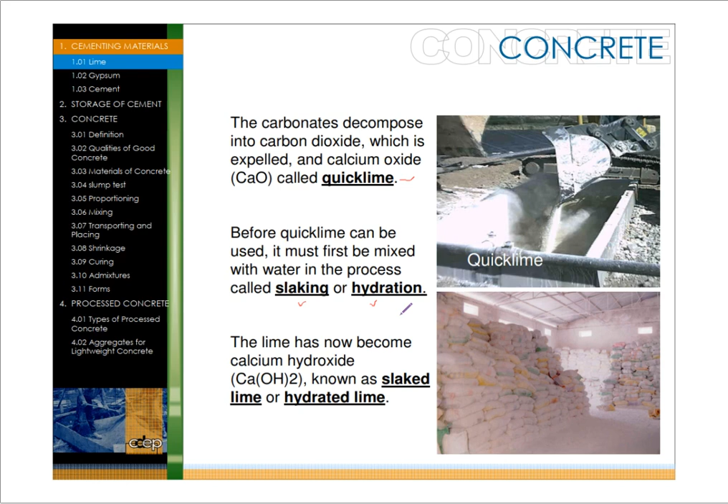So ito yung itsura ng hydrated lime, which is mixed with water to make it a lime putty. Parang halo siya with cement. Used as an ingredient for hard finish coat of 2 or 3 coat Portland cement plaster.

So it's used for mixing cement, mortar, concrete to increase workability, decrease permeability to water, kasi hydrated nga siya, kaya siya tinawag na hydrated lime, in order for the cement to be more workable, reduce cracking due to shrinkage. Kasi pag masyadong marami yung cement mo, it will crack often.

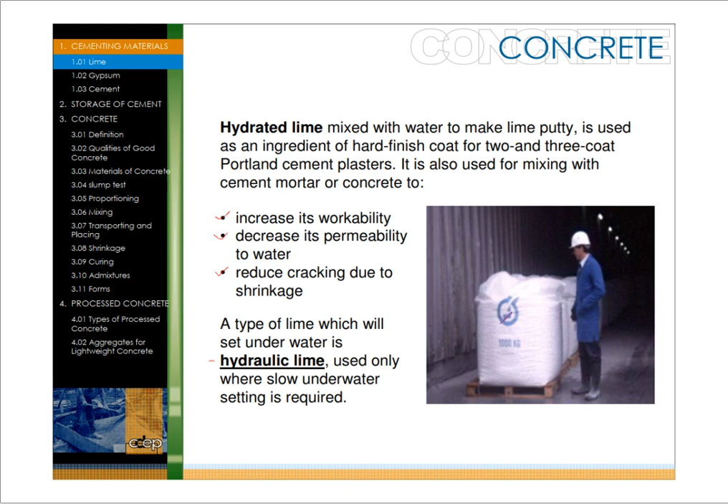So the type of lime which is underwater is called hydraulic lime, used only where slow underwater setting is required. Like for example, works on rivers, seaports, etc. Now that has something to do with concrete underwater or near shoreline.

Next type of cementing material, we have gypsum, another type na cementing material. So gypsum, like lime, was used as a plaster by Egyptians. Kumbaga siya yung isa sa mga ginagawang plastering finishes. Yan yung itsura niya, parang lime din. Used by Romans, Greeks, and Egyptians.

Plaster is from the Greek word for both the raw material and the calcined product. So in architecture terminology, plaster and gypsum are often used interchangeably. So sometimes it became similar. So the remaining product is plaster of Paris, which is pure gypsum, or hard wall plaster if 39.5% impurities are present or a retarder is added to set and improve the setting quality.

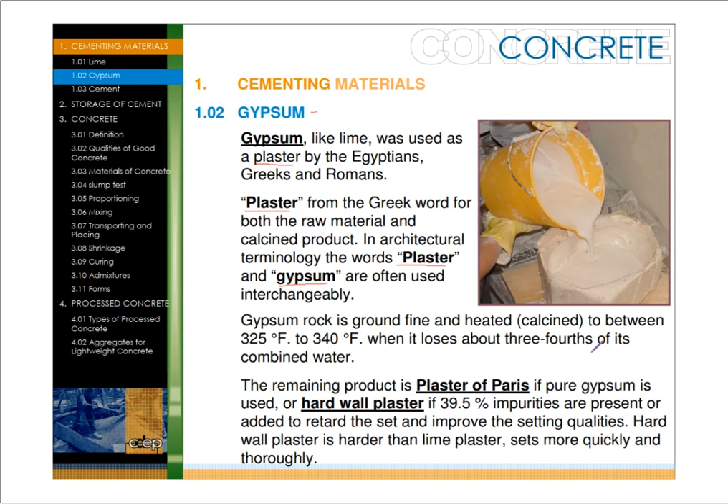Hard wall plaster is harder than lime plaster and it sets more quickly and thoroughly. So yan yung characteristic ni gypsum compared to lime. Okay? And gypsum plaster is rendered more plastic by addition of hydrated lime. Fiber or hair is sometimes added for greater cohesiveness.

So may mga tinatawag tayong admixture or foreign material to be added in gypsum cement to make it stronger. The fiber may be hemp, ito yung mga pwedeng ihalo diyan sa gypsum plaster natin, sisal or jute. The hair is generally clean goat or cattle hair so that hindi siya madaling mag-crack or hindi siya madaling mag-deform or masira kagad in case na matamaan siya ng anumang bagay.

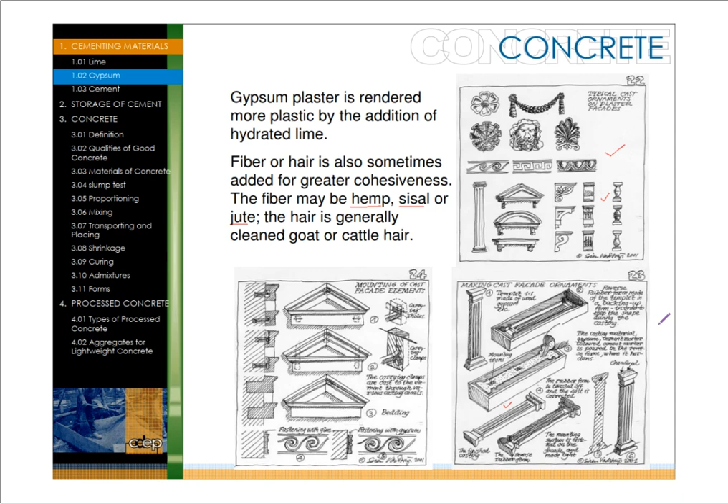And lastly, the very modern type of cementing material, we have the cement, which was first developed by Romans by mixing slaked lime. Ano yung slaked lime natin? Yun yung hydrated lime natin, with pozzolana, volcanic ash. Slaked lime plus pozzolana, which hardens underwater.

So with the fall of the Roman Empire, the art of cement making was lost for several centuries. So in 1756, Smeaton, an Englishman, rediscovered hydraulic cement, but it was not until 1824 that Aspdin, an English bricklayer and mason, invented and patented Portland cement.

So kay Aspdin napunta yung authorship ng pagiging inventor ng Portland cement. Kasi pag hindi mo yun na-patent, hindi talaga mapupunta sa'yo yung credits. So today, the word cement generally refers to Portland cement.

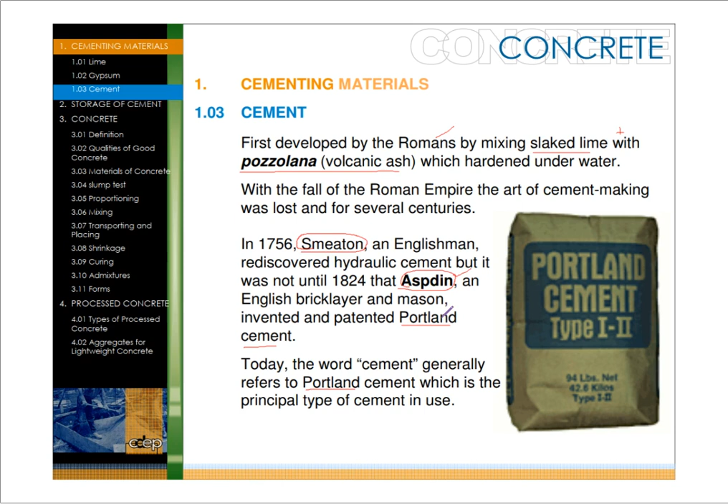That's one of the most popular brands of cement since the first release of cement, type 1 and type 2. Portland cement is obtained by finely pulverizing clinker produced by calcining a proportionate mixture of

argillaceous material. Argillaceous is composed of silica and alumina, and calcareous, which is lime. So these are the two main components or materials for cement: argillaceous, consisting of silica and alumina, and calcareous, the lime. So if you're wondering what are the ingredients for cement, Portland cement to be exact,

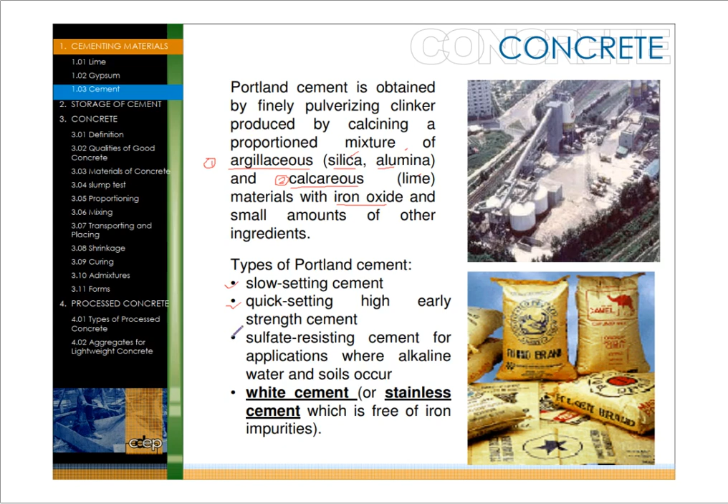it's just argillaceous and calcareous, with iron oxide and small amounts of other ingredients. So these are the types of Portland cement: slow setting, quick setting, sulfate resisting, and white cement.

Storage. So basically you're going to store cement in a storage area which has a wooden floor, raised. So it has a raised floor. Why do we put it raised? So that the moisture from our flooring won't reach the bottom of your Portland cement.

Because if it makes contact with water, or even if it just gets some moisture, it will harden. Not immediately, but some part of it cannot be used anymore once the cement hardens. So it's suggested to be 12 inches from the ground.

So cement is soft, silky to the touch, and lumps do not readily break. And the piles should be limited to 12 sacks in height. So when we count this, it will stack to a maximum of 12. You can go below 12, just don't exceed 12.

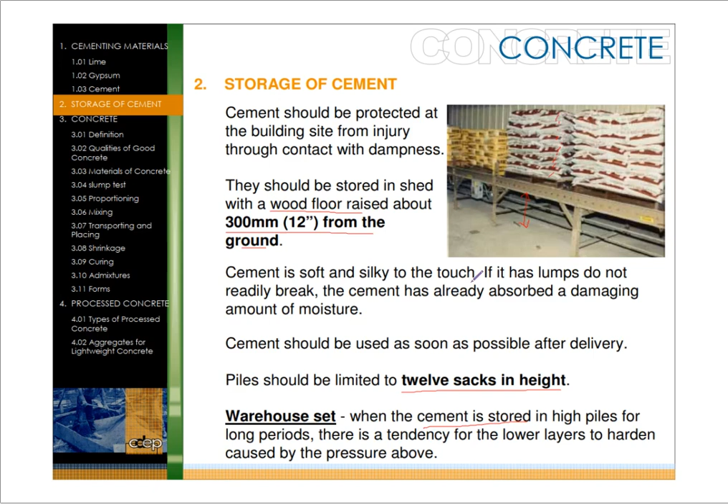Warehouse set, so it is the storage for cement for a long period of time. That's for the hardware stores, when they store a certain amount of cement in their storage.

The definition of concrete: it is a proportioned mixture. Why proportioned? We'll find that out later. So concrete is basically consisting of cement, aggregate, and water.

If cement is removed, it can't be called concrete. If aggregate is removed, leaving only cement and water, it's still not concrete. And if it's water only, you can't call it concrete either. It is basically a mixture of all three.

So it's a plastic mass which can be cast, molded, and formed into a predetermined size and shape. You can have a mold — that's what it means. Upon hydration, it becomes stone-like in strength, hardness, and durability. Hardened concrete is called setting.

That's why we have what's called 28-day setting. Like in our columns, it hardens to its maximum. The compressive strength is achieved at 28 days. That's why before removing the forms, it should be practiced at 7 days or more for the setting.

When mixed with water and fine aggregates less than that, it is known as mortar, stucco, or cement plaster. So when it's mixed with fine aggregates, that's what it's called.

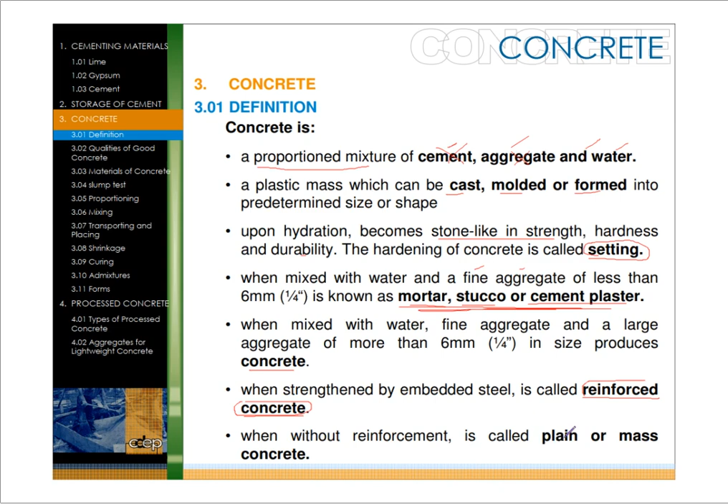When without reinforcement, it is called plain or mass concrete, or 'buhos' in Tagalog. Plain or mass concrete.

For the qualities of concrete, it should be strong, durable, uniform in quality, and thoroughly sound. That doesn't mean it has no imperfections at all, but it should be checked for this good quality of concrete. And it should be obtained through careful selection of materials, correct proportioning, thorough mixing, careful transporting, and proper curing period.

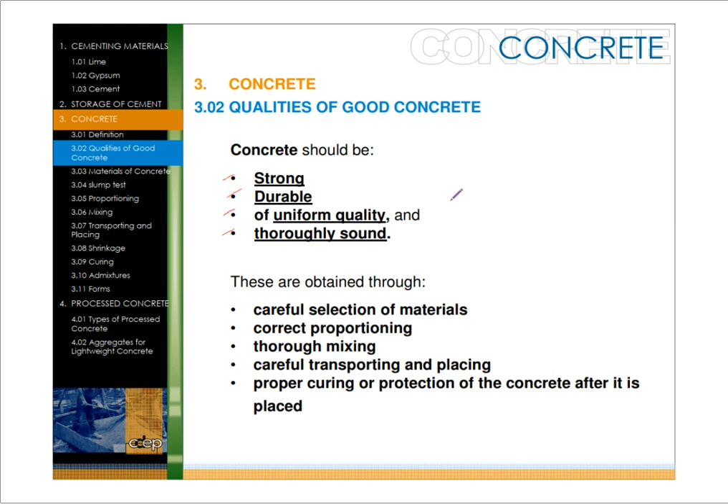We have materials, which is cement, and it conforms to the specification and test of Portland cement of the American Society for Testing Materials, or what we call ASTM, the standard specification and test for Portland cement. And the kind of tests usually made are soundness, constancy in volume, time of setting, fineness, and tensile strength.

So 1 bag of cement is approximately 1 cubic foot in volume that it can occupy. 1 cubic foot, and it weighs 94 pounds.

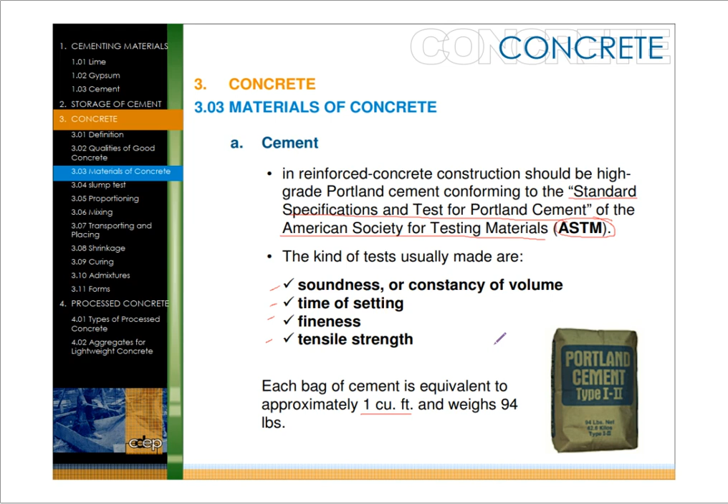Aggregates. These are the rocks, or small rocks. Depending on the size of the rock you put in the cement, it becomes called differently. So, if there are aggregates present in cement when mixing.

These are inert mineral fillers. It fills the larger gaps when you mix the cement with other combinations, cement and water and aggregates. So these are the fillers. It should be particles that are strong, durable, clean, hard, and uncoated, free from injurious amounts of dust, lumps, flaky particles, shale, alkali, and other foreign substances.

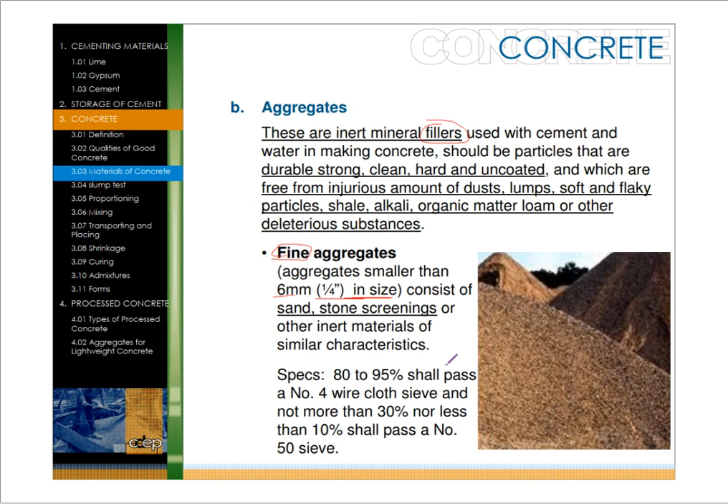For an aggregate to become fine, it should be smaller than 1/4 inch in size, or in millimeters it's 6 mm. It consists of sand, stone screenings, and other characteristics.

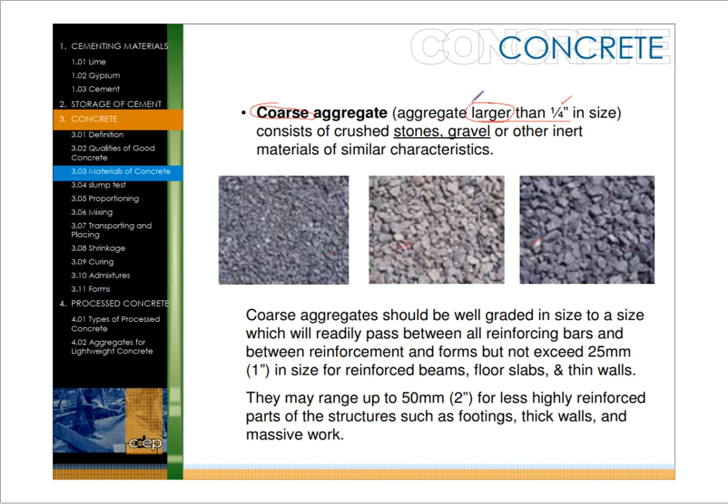Coarse aggregate. For it to be called coarse aggregate, it must be larger than 1/4 inch in size. It is consisted of stones, gravel, and other inert materials with similar character. This is what it looks like. There's a difference, but it should be larger than 1/4 inch in size to become a coarse aggregate.

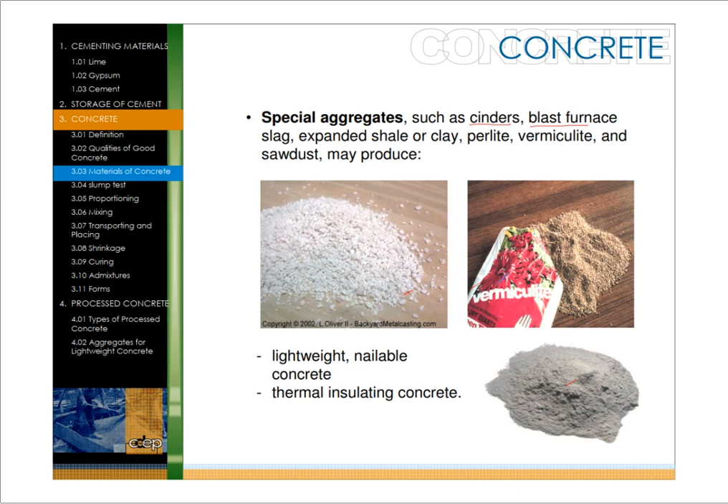Special aggregates such as cinders, blast furnace slag, expanded shale or clay, perlite, vermiculite, and sawdust may be used. These are examples of special aggregates, which are also mixed into the cement.

Water is the third material that concrete is composed of, and it should be free from oil, acid, alkali, vegetable matter, and other deleterious substances. It should be reasonably clean and clear. The use of sea or brackish water is not allowed, so don't get water from the sea.

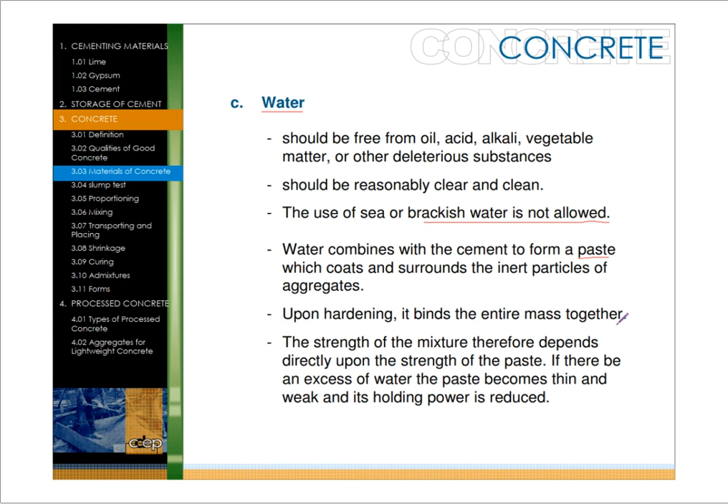Water combines with the cement to form a paste, paste-like, which coats and surrounds the inert particles of aggregates. Upon hardening, it binds the entire mass together, and the strength of the mixture depends directly upon the strength of the paste. If there is excess water, the paste becomes thin and weak, and its holding power is reduced.

Water-cement ratio is the amount of water used per bag of cement. It usually varies from 5 to 7 gallons, which is 6.5 on average.

The less water in the mixing, the better the quality of concrete, because if you add too much water, your concrete will become weak. It will be watery, and most of the concrete will be wasted in the water once you pour it into the forms. So this is the water-cement ratio, which has something to do with the compressive strength of your cement once it hardens.

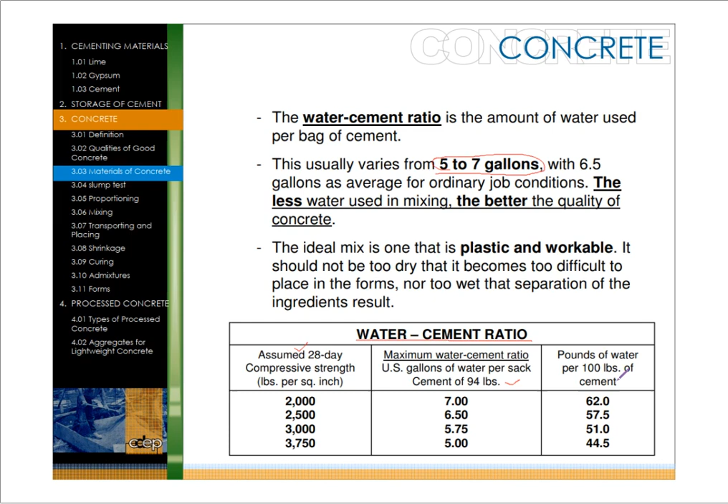Maximum water ratio is expressed as gallons or pounds of water per 100 pounds of cement.

Slump test. This is the test done by the structural team, which measures the consistency of the concrete mix. How do we determine this? In this test, the tendency of the mix is to slump or reduce in height due to gravity action.

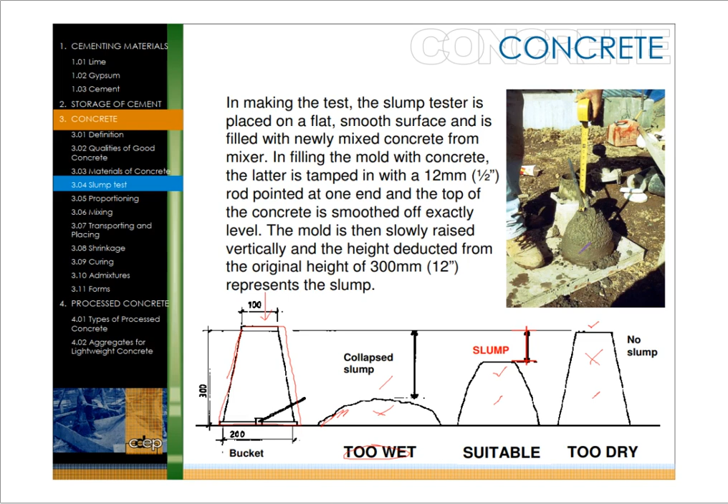So the mold is slowly raised vertically, and the height deducted from the original height of 300 mm is presented as the slump. This is what it looks like after the test, in this area.

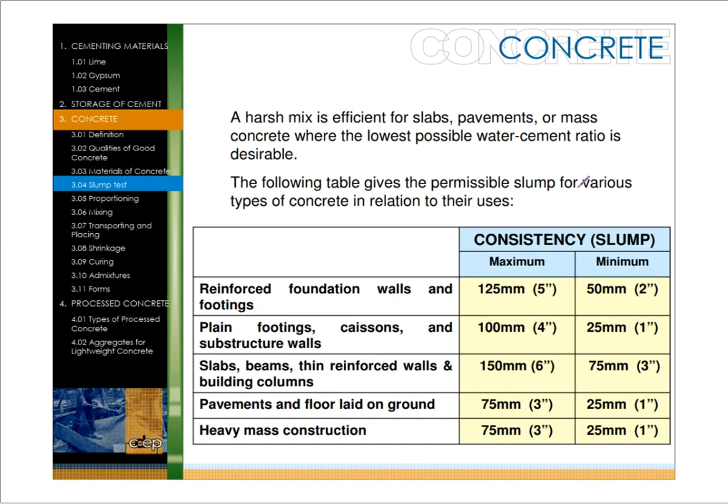We won't focus too much on this since it's more on the engineering side. So, proportioning a concrete: the strength and workability of a concrete mix depends on the water-cement ratio, and the economy of the mix depends on the proper proportioning of the fine and coarse aggregates. It basically has a relationship with the mixture you are going to use.

There are several methods for proportioning concrete. Number one is proportioning by arbitrary proportions, water ratio, slump test, water slump test, and fineness modulus.

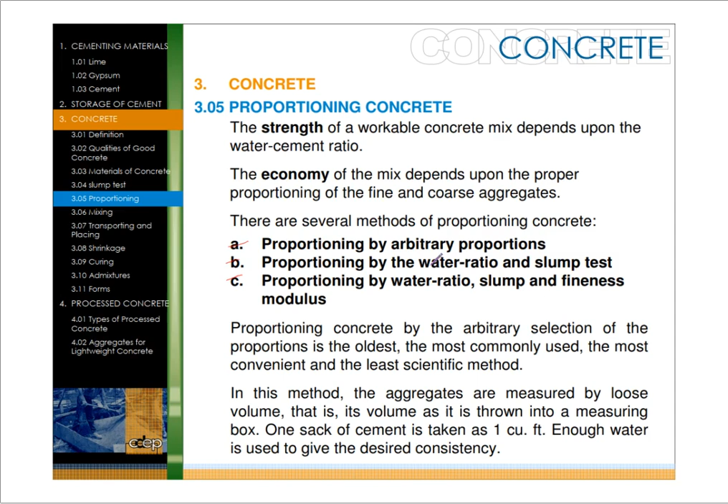So for proportioning by arbitrary proportion, meron tayong sukatan para sa certain proportioning. This kind of proportioning has been used by the construction industry for many years. Hindi ko lang sure kung meron pa siya ngayon kasi ngayon yung ginagamit is yung mga concrete mixer, may 1-bagger, 2-bagger, etc. So proportioning concrete by arbitrary selection is the oldest, the most commonly used dito sa province, sometimes ginagamit pa rin, and the most convenient but least scientific method kasi estimated lang ng mason or ng foreman.

For the common mixes expressed in proportion by volumes of cement, the fine aggregates to coarse aggregate are as follows. Different classes of concrete proportion are established for us to know how much or how many concrete aggregates are being used, and gravel also is present.

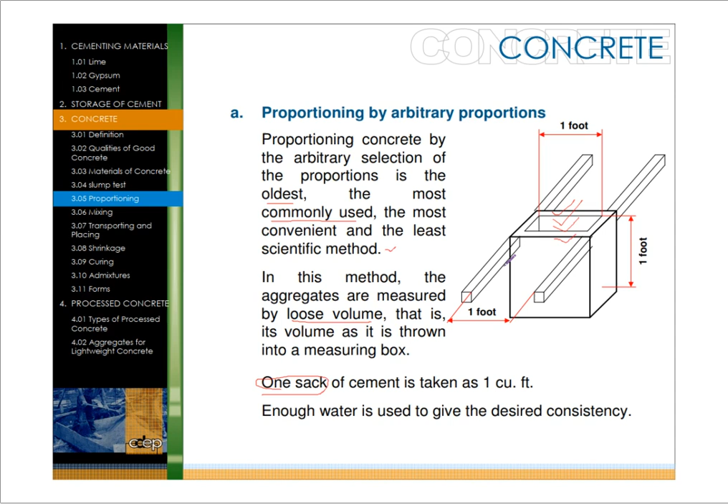Okay, so saan yan ginagamit? For suspended slabs, beams, columns, arches, stairs, wall of 100 mm or 4 inches thick, yung kumbaga yung normal wall natin sa mga bahay natin for the interiors, 4 inches thick. So that is class A na proportion.

How about class AA? Etong class AA, 1 sack of cement, 1.5 sacks of sand, sacks din yan kasi basically yan yung ginagamit natin, and 3 sacks of gravel. For concrete, underwater, and retaining walls, yung usage niya. Same goes with class B, class C, and class D, you just have to know how it incrementally increases from class A, B, C, and D.

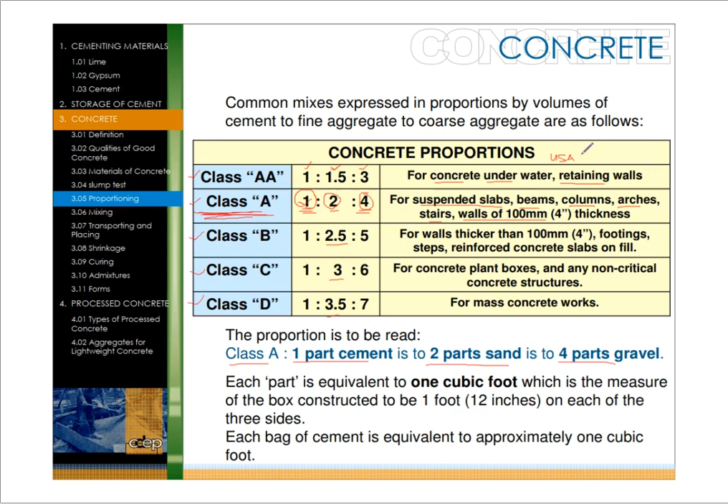So magkakaiba yung proportion niya. Lumalabas din to minsan sa board exam. Isa to sa pinaka naalala ko nang kumuha kami, tinanong yung class A, yung nasagot ko pa is 1:2:3. Kaya dito pa ako nagkamali, na sobrang dali lang siya sa uluhin. So they have different kinds of usage, ito yung kanyang usage typically for the concrete proportions.

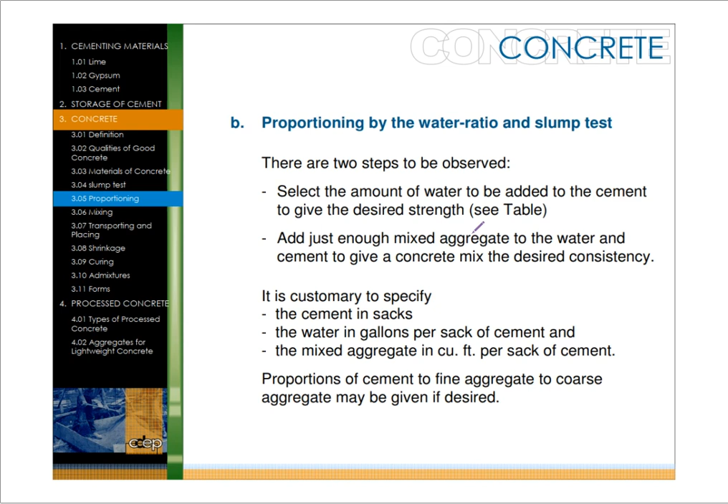Okay, moving on. Ito, water ratio and slump test, hindi na natin itong masyadong ginagamit, pero pag malaking construction, ginagamit yung slump test para sa proportioning.

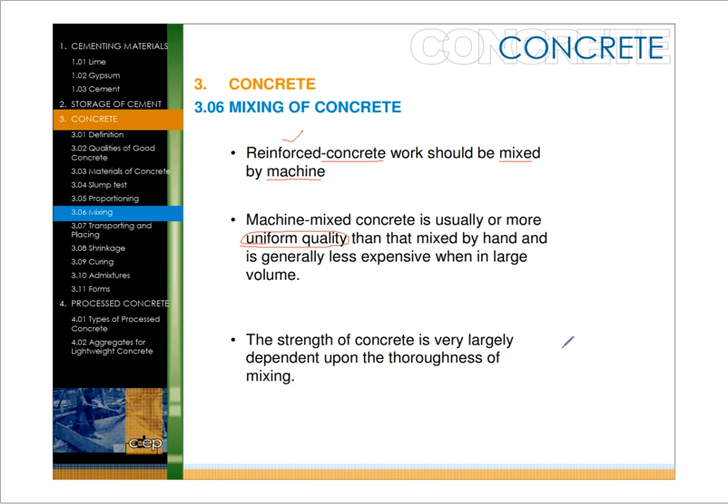So the strength of concrete is very largely dependent upon the thoroughness of mixing. Letter A, we have machine mixing. So machine mixing is the mixing of a batch should not be less than 1 minute, para mahalo siya ng maayos.

After all the materials are in the mixer, ito yung mixer natin, sometimes it is 1 bagger or 2 baggers. It means, pag 2 bagger, dalawang bag yung pwedeng mahalo sa isang mixing batch, and the mixing time should increase to 1.5 to 2 minutes, and the entire contents of the drum should be discharged before recharging the mixer. So dapat ang next batch na mixing should be before it maisalang ulit, kailangan mo munang ipour down yung nakasalang.

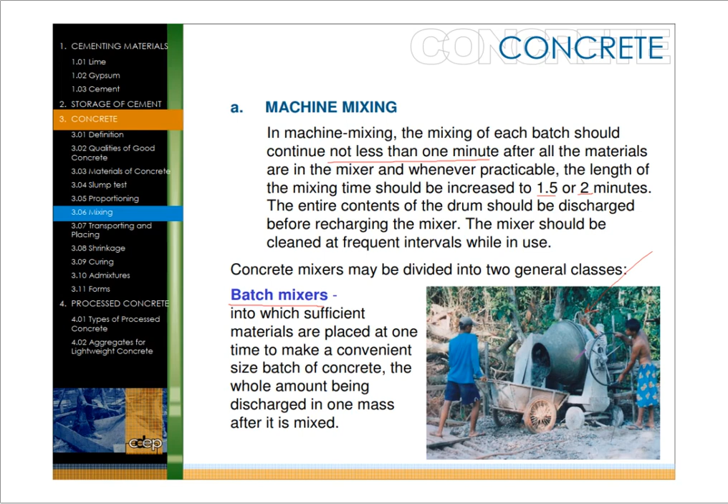And the mixer should be cleaned at frequent intervals while in use para hindi tumigas yung natitirang mga semento dun sa loob. So concrete mixers may be divided into 2 general classes. Number 1, batch mixers, into which sufficient materials are placed at one time to make a convenient batch of concrete, the whole amount being discharged in one mass after it's been mixed.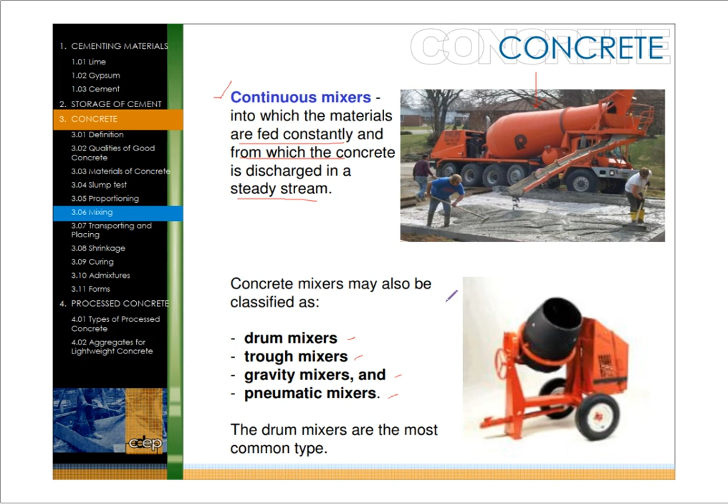Number 2 is continuous mixer. Ito na yung ginagamitan ng mga malalaking trailer trucks, no? Mas malaki yung nadadala nito sa site. So its materials are fed constantly and the concrete is discharged in a steady stream. So these concrete mixers may also be classified as drum mixers, gravity mixers, and pneumatic mixers. The drum mixers are the most common type. Ito yung itsura niya, the drum type mixers.

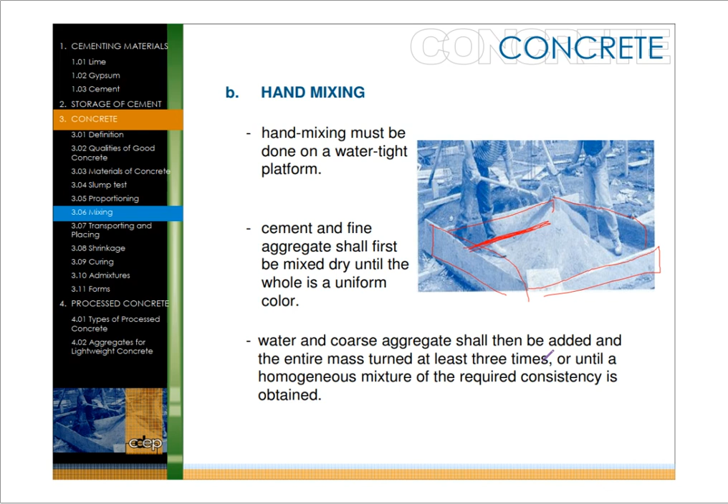Hand mixing. For the hand mixing naman, it must be done on a watertight platform. So kung na-notice ninyo, meron silang plywood na ginawang box. And yung sa baba dapat is merong plastic na mag-i-stop ng tubig if ever man na dumaloy yung halo doon. Cement and fine aggregate shall be mixed first, dry, until the whole is uniform in color. Okay? Then water and coarse aggregate shall be added, and the entire mass must be turned 3 times or until a homogeneous mixture of the required consistency is obtained.

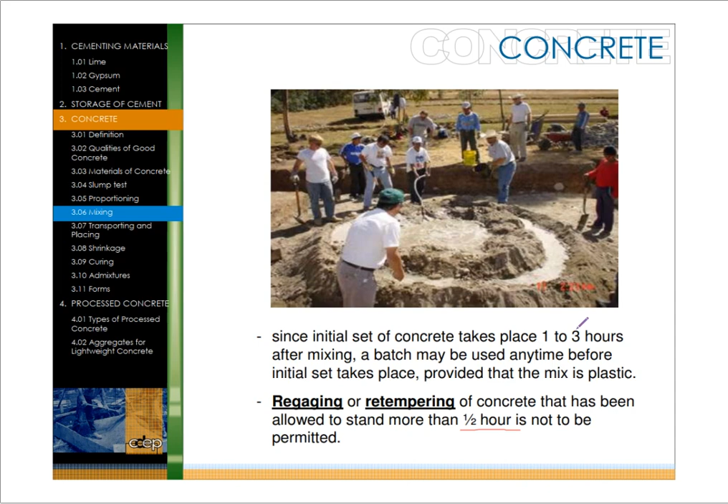Sa batching plant. So retempering of concrete that has been allowed to stand more than half hour is not to be permitted. Kumbaga, iniwan mo siya ng almost half hour or more than that, di mo na dapat gamitin. Kasi nag-set na, tumigas na. So kahit i-mix mo ulit yan, nawawala na yung compressive strength.

Next is transporting and placing of concrete. So fresh concrete should be transported from the mixers as rapidly as practicable by methods that will permit the placing of concrete in the forms before initial set, without loss or separation of materials. Kaya wala kayong nakikitang mixer sa umaga kasi traffic sa Manila. Sa gabi yan mostly lumalabas para yung estimated time of arrival niya hindi ma-delay at hindi cause ng problem if ever ma-traffic siya. It should be on time yung kanyang pagdating dun sa site.

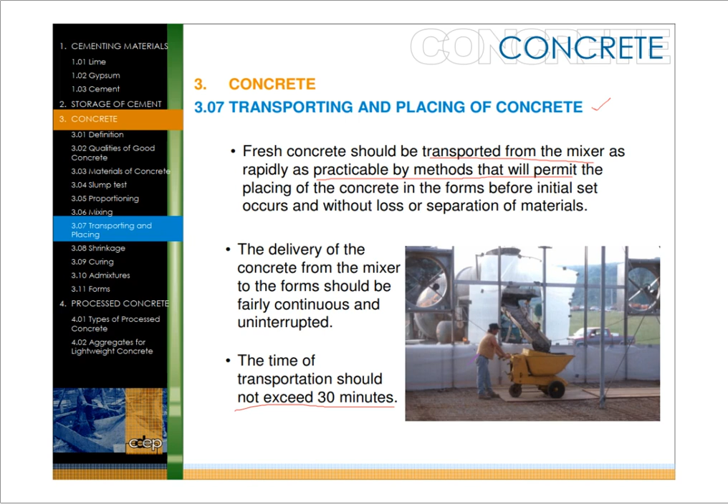So the delivery of concrete from mixer to the form should be fairly continuous and uninterrupted, unless malapit lang yung batching plant sa site. The transportation kasi should not exceed 30 minutes. Kasi pag lumampas na ng 30 minutes, magse-set din yung concrete mo doon sa truck, titigas na yon. So concrete may be transported by barrows, buggies, buckets, cableways, hoists, chutes, belts, and pipes. Pag malayo sa kalsada yung job site, minsan nilalagyan ng GI pipe para i-shoot doon sa job site.

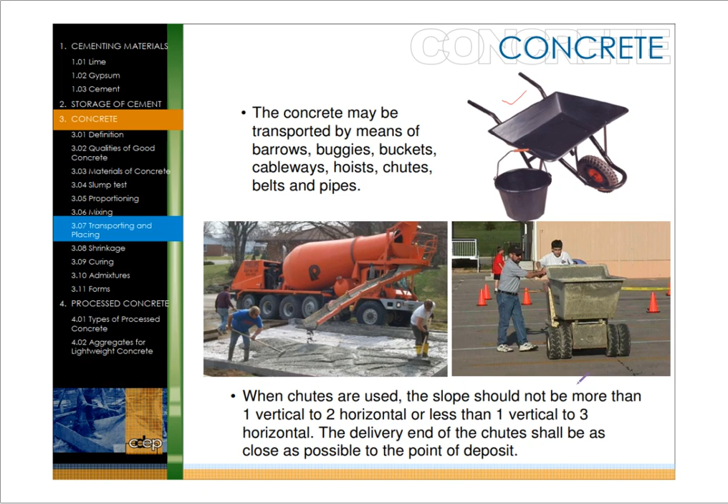So when chutes are used, the slope should not be more than 1 vertical to 2 horizontal or less than 1 vertical to 3 horizontal. So before placing the concrete, the forms should be cleaned and inspected, surface wetted or oiled, and reinforcement properly secured. Mga formas natin should be sturdy enough to hold the concrete before nyo siya tanggalin. Pag hindi maayos yung formas, minsan nagiging failure yung pagbuhos.

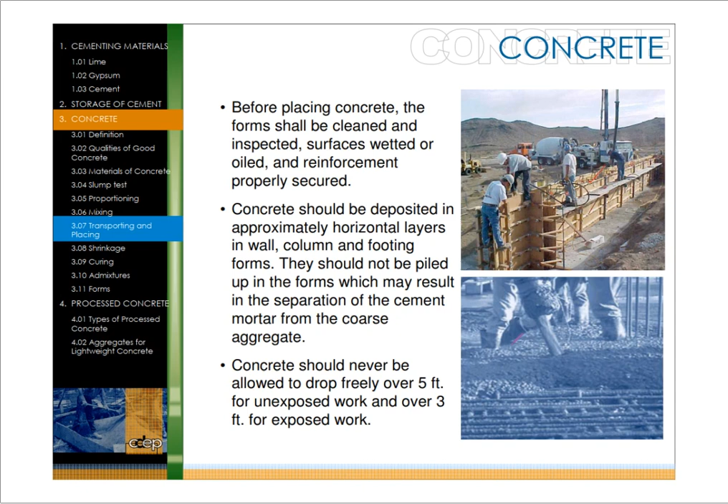So concrete should be deposited in approximately horizontal layers in walls, columns, footings, etc. Concrete should never be allowed to drop freely over 5 feet for unexposed work, over 3 feet for exposed work. For the shrinkage naman, shrinkage of concrete due to hardening and contraction from temperature changes causes cracks, the size of which depends on the extent of the mass. They cannot be counteracted successfully, but they can be minimized by placing reinforcement, yung mga bakal, so that large cracks can be broken up to some extent into smaller ones.

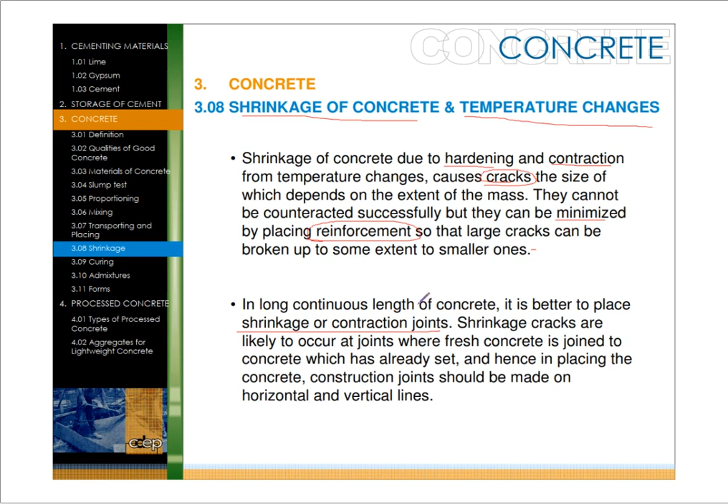In long continuous lengths of concrete, it's better to place shrinkage or contraction joints. May uka na nilalagay pag continuous yung concrete mo. Cracks are likely to occur at joints where fresh concrete is joined because gumagalaw at nagsi-shrink yung concrete. For the curing of concrete, it must be allowed to cure or harden after it's been placed. Hardening of concrete is a slow process in which the cement and water unite to form compounds that give strength and durability to the concrete. The three main factors are age or time, temperature, and moisture.

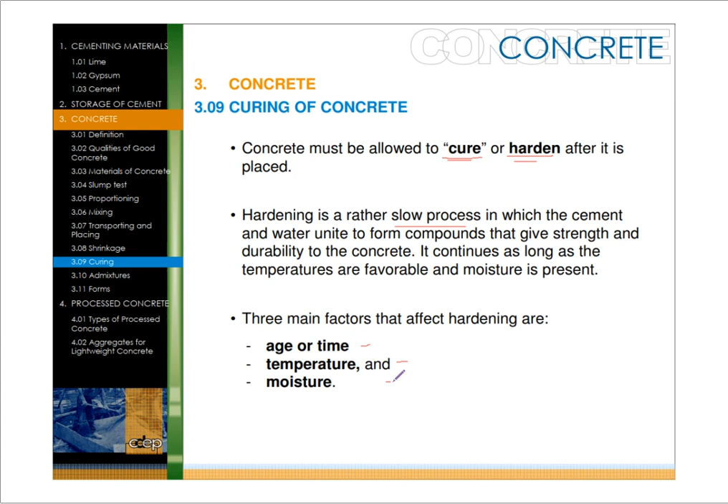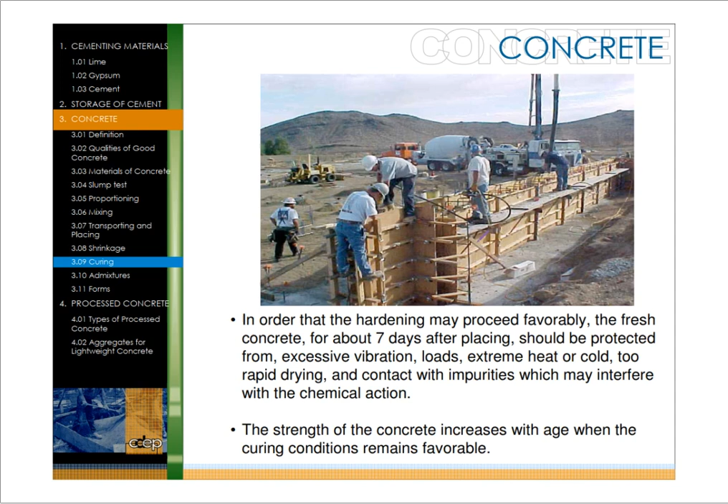So ito yung itsura, no, ng concreting natin for them to settle on its formas. The strength increases rapidly during the early stage and continues more slowly as time goes on, and the compressive strength reaches about 60% of its maximum value at the age of 28 days and about 80% at an age of 3 months.

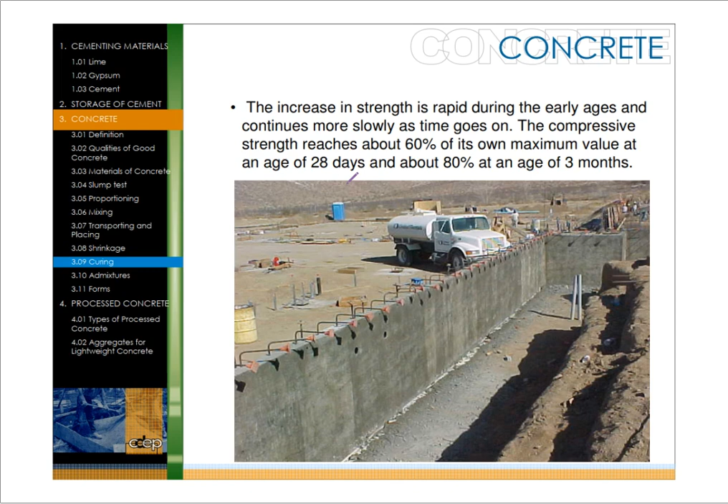Curing is primarily keeping the concrete from drying out too rapidly, kaya binabasa natin siya every morning and afternoon. So it should be covered, no? And the floor shall be covered with paper sacking wetted down at the edge with burlap, sand, and earth kept moist, after the concrete is hard enough to walk on.

Removal of forms at prescribed time. So hindi dapat tanggalin kaagad yung mga formas natin until the time specified. Depende kasi sa part, no, ng residential or ng building yung binuhusan. Magkakaiba yung curing time na removal of forms ng isang column, ng isang beam, at saka ng mga slabs natin.

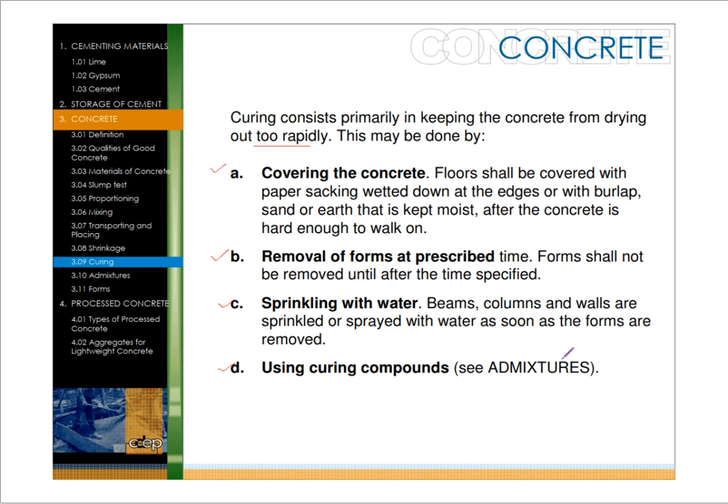Sprinkling with water, kaya siya binabasa. Beams, columns and walls are sprinkled or sprayed with water as soon as the forms are removed. And using curing compounds, no? So mamaya meron tayong admixtures. Ito yung mga curing period, no? Depending on the part of the building that has been concreted.

So pag nagbuhos ka ng footing mo, the curing period of that footing is 1 day for massive footing. Cantilever footing, yung nakahang, is 5 days, and the slab footing is 5 days. For walls and plasters naman, up to 2 meters high, it is 1 day, plus 1 day for each additional meter fraction, up to 30 centimeters thick or more. For up to 2 meter high na wall, 2 days, 48 hours, and 1.5 days for each additional meter. For without loads, same as B.

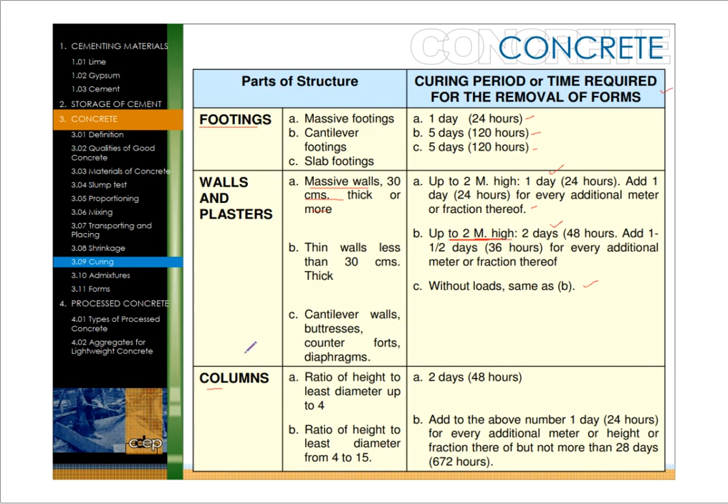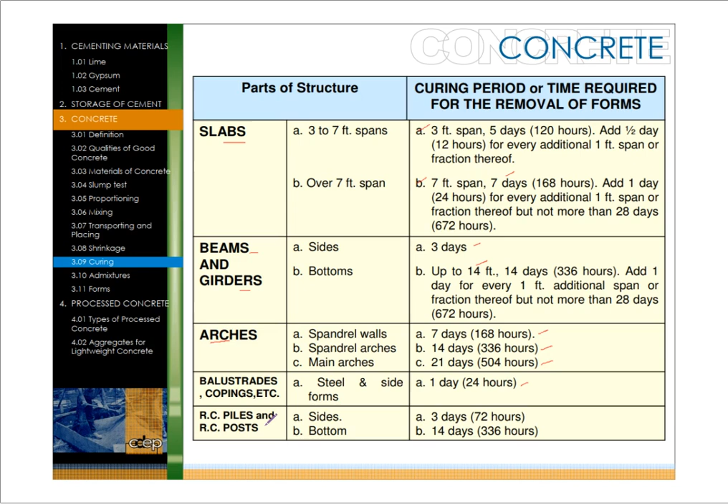For the columns, 48 hours. For the slabs, 3 feet span is 5 days. For 7 feet span is 7 days. For beams and girders, we have 3 days or up to 14 days upon the removal of forms. For arches, before removal of forms, it should be 7 days. For spandrel arches, 14 days. And for the main arch, it's 21 days. For balustrades, yung mga sa terraces natin, it should be 1 day. For piles and posts, it should be 3 days for the sides and 14 days at the bottom.

Moving on sa admixture natin, these are the substances na hinahalo natin dun sa cement or sa concrete natin, added to cements, mortars, and concrete for the purpose of improving or imparting particular properties such as improved workability, improved durability, accelerating setting or hardening, retarding or nagpapatagal ng tigas ng ating semento bago siya mag-set, improved wear resistance, impart water repellency.

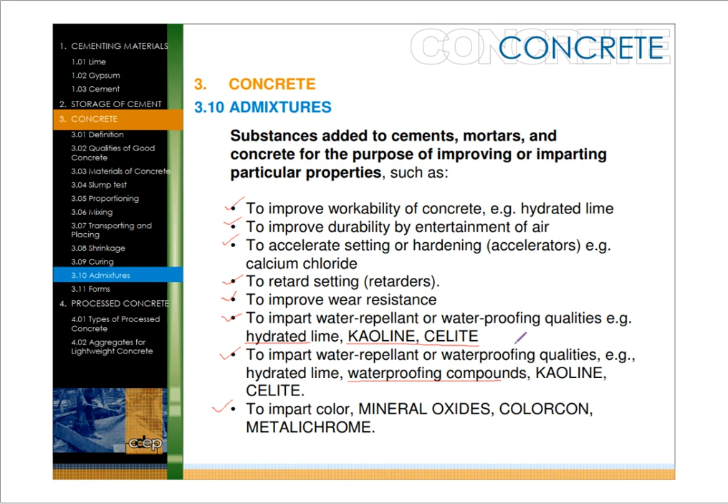Okay. Yung isa is from kaolin and celite. Example niyan is hydrated lime, kaolin, and celite. Yung isa naman is waterproofing compounds, kaolin, celite pa rin. Impart color: mineral oxides, colorcon, light colorcon, and metalichrome. So these are the main 3 categories for admixture, no? Mixing into concrete, mixing into mortar, surface application, or finish. These admixtures come in powder, paste, or liquid form.

So yun yung mga hinahalo natin sa concrete natin before siya mag-set. These admixtures include accelerators to speed up setting time. Kung nagmamadali kayo sa slab nyo na titigas agad because of certain conditions like malapit na yung rainy season, hindi kayo makapaghintay, especially pag rainy season, nilalagyan ng accelerators para tumigas agad yung semento natin kasi masisira yung compressive strength pag nabasa yung bagong buhos.

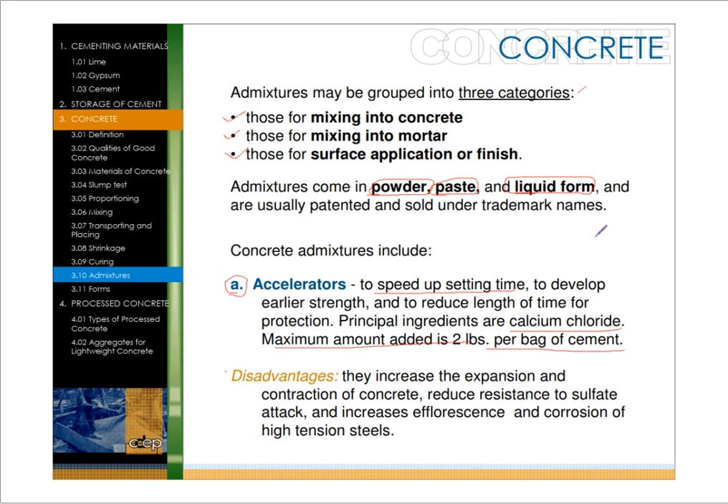So the principal ingredient is calcium chloride, and the maximum added is 2 pounds per bag of cement. The disadvantages of accelerators are that it increases the expansion and contraction of concrete, reduces resistance to sulfate attack, and increases efflorescence and corrosion on high tension steels. So yan yung admixture natin na accelerator.

For the retarders, ito naman yung kabaliktaran ng ating accelerators. Retarders slow down the hydration of cement during very hot weather, for you to make it more workable. It may cause some loss of early strength and therefore requires careful control and more frequent slump tests.

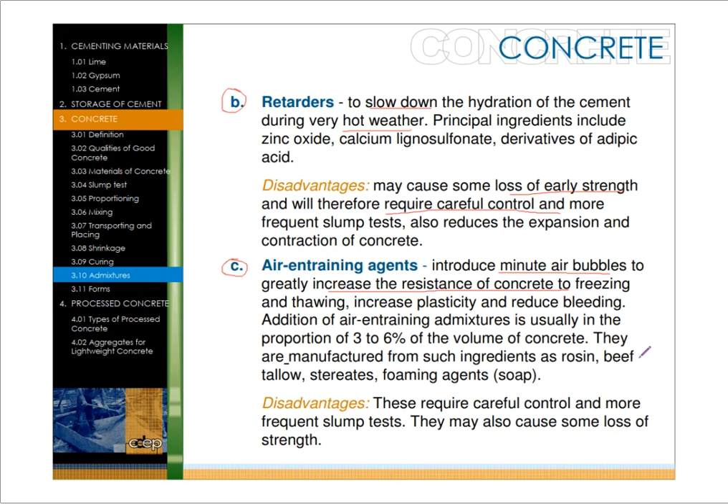Type of admixture: air entraining agents. These create minute air bubbles to greatly increase the resistance of concrete to freezing, pag nagbubuhos ka naman sa mga cold countries, especially sa mga winter climate. The disadvantage of this is it requires careful control and more frequent slump tests.

Next example is inert or finely divided powders such as glass, silica sand, stone dust, and hydrated lime. Hinahalo siya doon sa mixing. This is to improve workability as per manufacturer's direction. Usually proportion is 10 to 15%, and the waterproofing admixture

then waterproofing admixture reduce the capillary attraction, the voids in the concrete or mortar. But when it decreases the water absorption of the concrete or mortar, it does not render concrete waterproof, and manufactured in stearic acid or its compound, mainly calcium stearate, and include asphalt emulsion. Ito yung ginagamit natin sa mga buhos natin sa septic tanks, CRs, sa water tanks, para walang leak yung mga tubig.

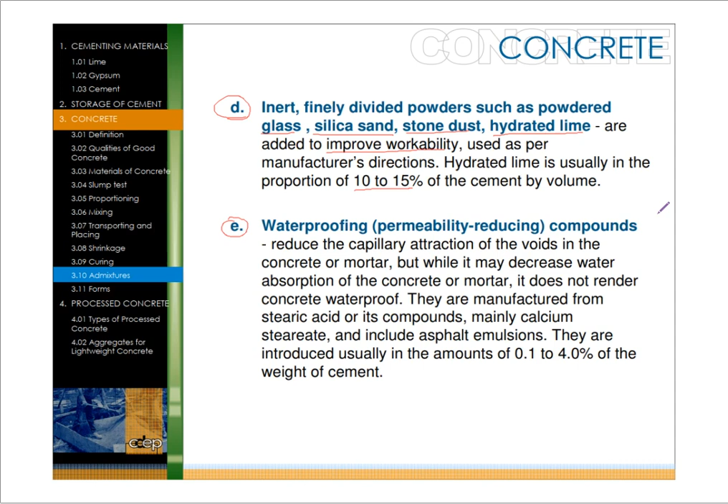Colored pigments, nilalagyan natin ng color yung ating semento. So it has 2 types, the dry cast and the integral colors. For the dry cast, for surfaces of coloring lang to, dusted on usually in 2 coats after surface water has disappeared. For the integral colors, for body coloring, integral color pigments are incorporated in the mortar topping and mixed with dry cement and aggregates before water is added to add color pigment.

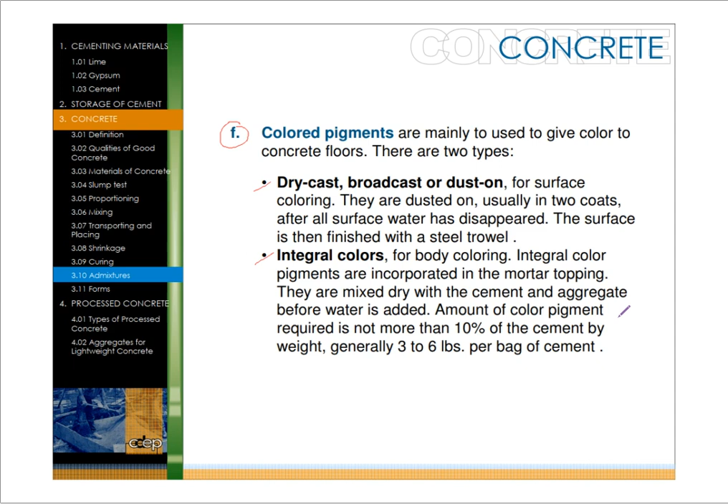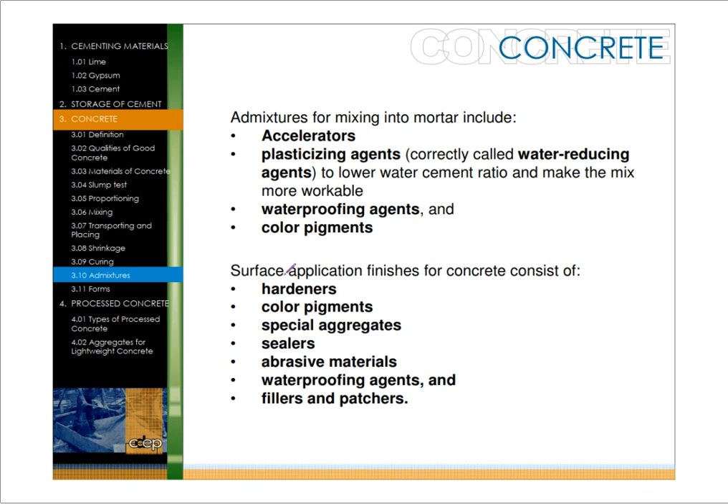So admixture for mixing into mortar includes accelerators, plasticizing agents, waterproofing agents, and color pigments. For the surface naman, top surface, pag nag-set na yung inyong semento, we have hardeners, color pigments, special aggregate sealers, abrasive, etc.

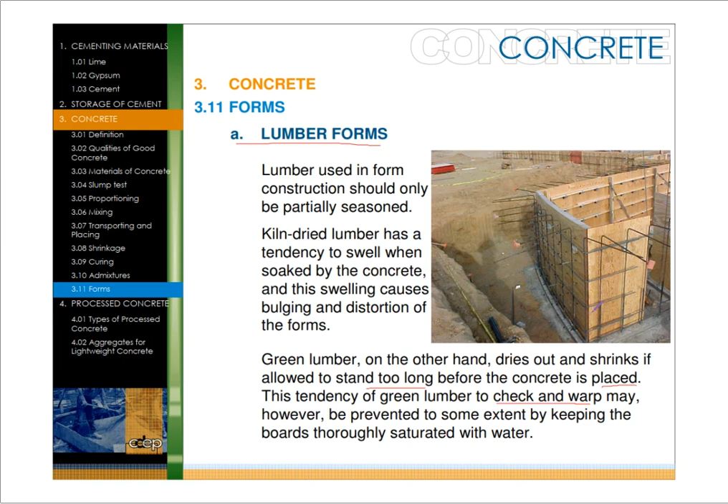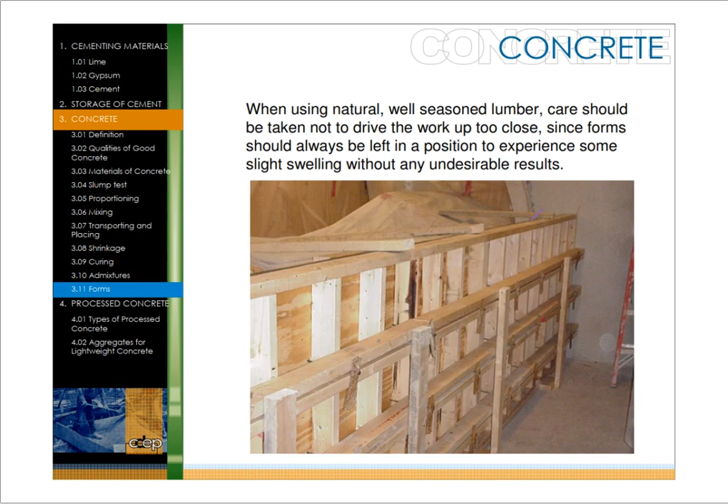Sheathing of lumber dressed at least one side and both edges are used when removal and cleaning the forms are necessary for reuse, pag gusto mo siyang gamitin ulit. Sheathing lumber should be dressed on all four sides and should be used in face work where smooth and true surface is important. So, kailangan hindi siya textured. If ever man gusto mo yung textured, mapa-interior man siya, on the other side naman yung smooth surface.

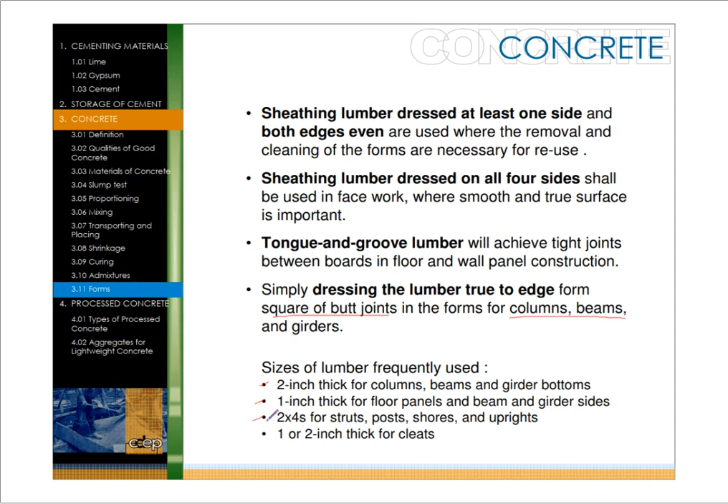Tongue and groove lumber, it should be achieved in tight joints between boards in floors and wall panel construction. The dressing of the lumber is true to edge, to form square or butt joint, for columns and beams and girders. Frequently used is 2 inches for the beams, girders, and columns, 1 inch naman for floor panels, beams, and girders, 2 by 4 naman for struts, posts, shores, and uprights, and 1 to 2 inch naman for the cleats.

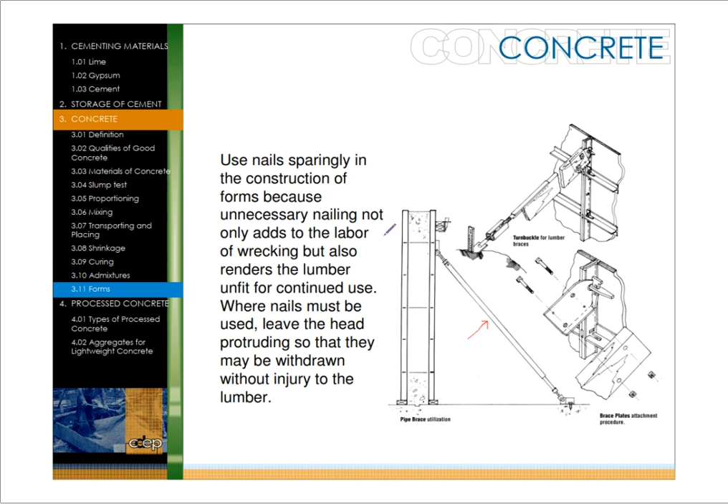Ito yung itsura niya pag nag-assemble ka ng forms. Meron siyang braces, meron siyang tukod. Ito yung brace niya, sinasabi natin. Metal brace, and it should have metal plates na nag-hold sa kanila. Sometimes kahoy lang din yung ginagamit nila, not metal, kasi mahal yung metal eh. Or sometimes nagrenta na lang for the other portions.

Alright, next kind of form is plywood form. So ito yung usually ginagamit natin sa mga residential houses. For smooth surface, required plywood should be waterproof, grade A, and at least ½ inch in thickness. Kasi pag masyadong manipis yung plywood natin, ginamit nating formas yan, pag tinanggal natin yan after the curing period, binaklas na natin yan, minsan nabibiyak or nasisira, at hindi na natin magamit ulit. So yung minimum natin na dapat gamitin is ½ inch for the plywood.

Steel forms, ito yung mga steel sheets natin, like pans for concrete joist, steel decking, corrugated steel. May mga steel decking kasi na tinatanggal after mabuhusan. Meron namang hindi na tinatanggal or kasama na siya dun sa buhos. Yan yung ginagamit minsan sa mga commercial spaces, kasi mabilis at madali lang siyang gawin.

Lalatagan mo lang ng deform bars or steel bars, then tsaka mo siya bubuhusan, at yung steel deck na yung sasalo. Wala ka ng forms na gagamitin. And another type of forms is plastic form. So basically, from the name itself, it is polystyrene plastic.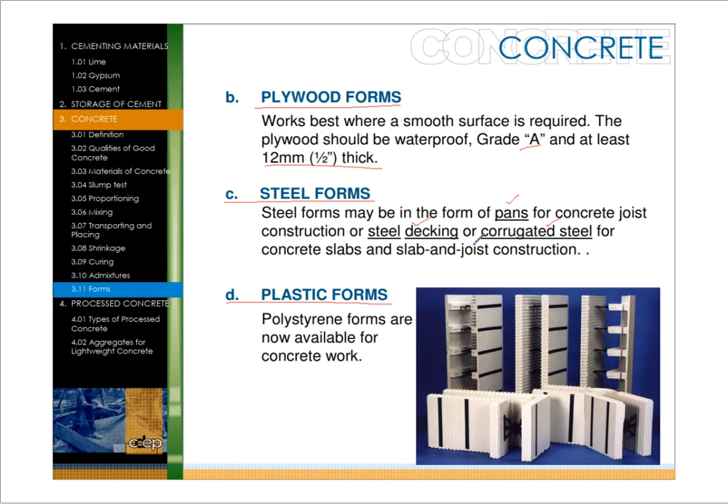Processed concrete, ito naman yung mostly processed na with some chemicals added. So number one type of processed concrete is aerocrete. This is lightweight. Kumbaga, di ba concrete is mostly heavy-weighted. So this one is light-weighted, expanded structural concrete produced by adding a small amount of metallic aluminum powder to the mixture of Portland cement or sand or cinders. So nilalagyan siya ng metallic aluminum powder.

With the addition of water, gas is generated and expands the wet mix and forms small air cells throughout the material. Used for structural walls, floors, roof slab, partition blocks for soundproofing, wall insulation, rooms of refrigerator plants, lightweight fill on top of structural floor and roof slabs.

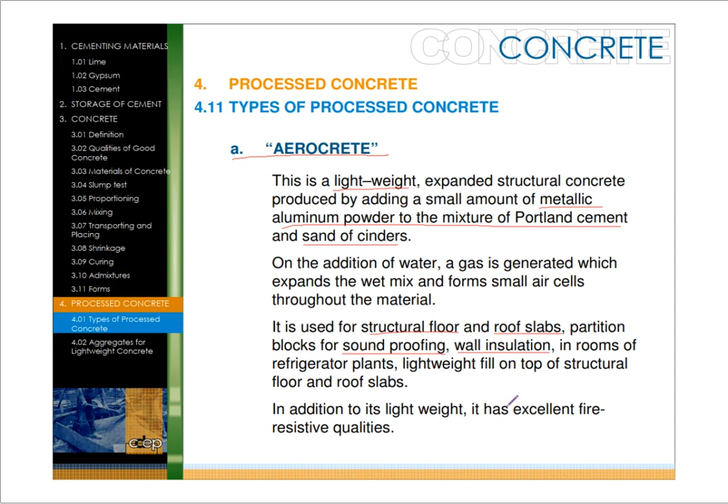Gunite, another type of processed concrete. It is the mixture of sand and cement deposited under high pneumatic pressure. So yan yung itsura niya. So buhos siya with machine under high pneumatic pressure, or tinatawag nating cement gun, which is required to supply water added before the dry constituents emerge from the nozzle. Before siya magbuga, nilalagyan niya na ng tubig kagad dun sa cement gun na ginagamit.

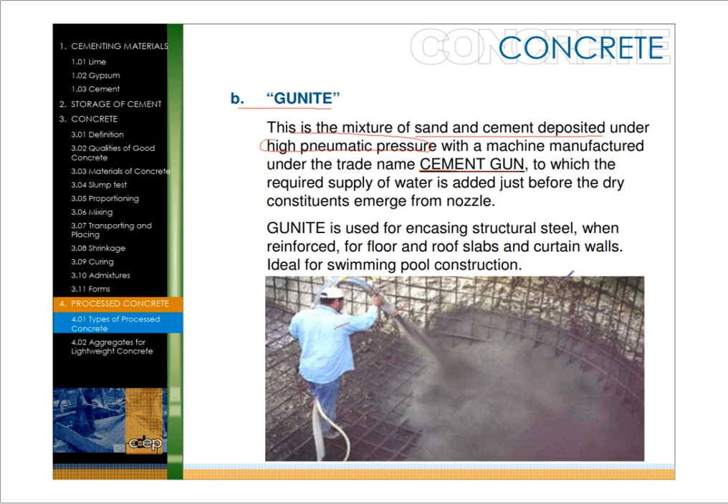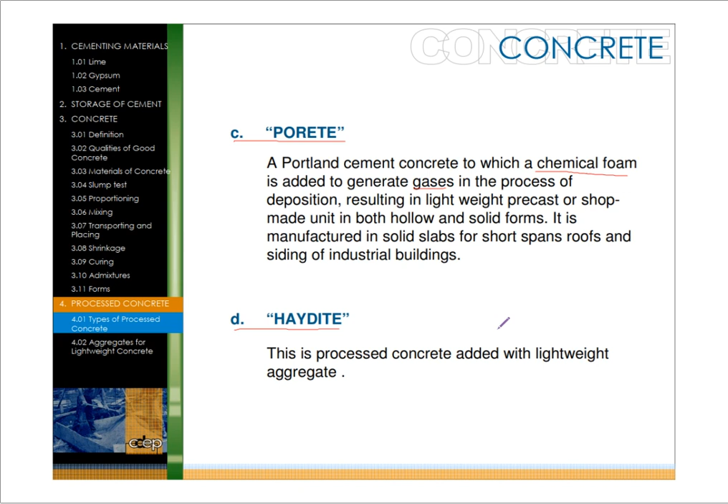Gunite is used for encasing structural steel, reinforced floor and roof slab and curtain walls, ideal for swimming pool construction. Kasi hindi tulad ng buhos, ito naman is meron siyang pressure. Kumbaga nakadikit na siya kagad pag tinutukan mo siya ng cement gun. Porete, next type of processed concrete. It is a concrete which has a chemical foam added to generate gases in the process of deposition. Next is haydite, processed concrete with lightweight aggregate.

Aggregates for lightweight concrete naman, advantages of this are reduction of dead loads. Kasi yung dead load is yung weight mismo ng concrete. The own weight of concrete is called the dead load. It saves structural steel, reduces bearing on foundation, and cuts cost of concrete forms. High insulating value provided by numerous dead air spaces, rough texture for surface, lightweight allows easier handling of precast slabs and blocks, and lightweight plaster has less tendency of cracking and is heat resistant.

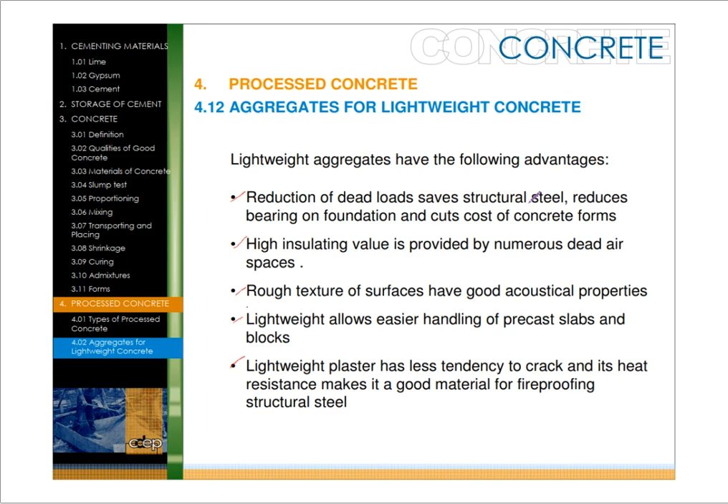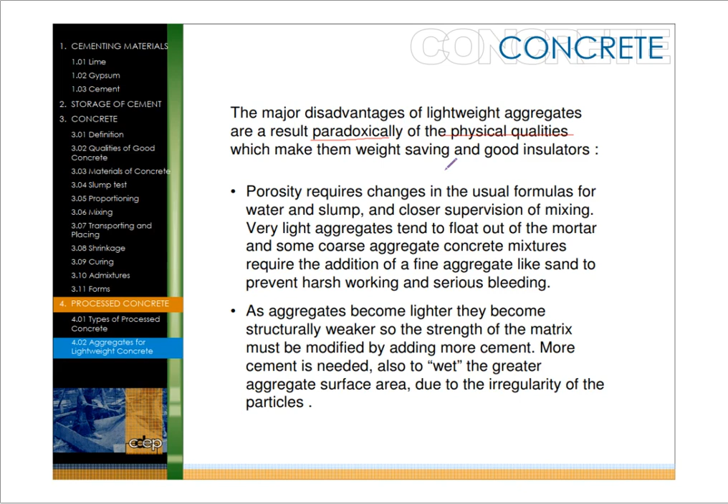Major disadvantage of lightweight aggregates results paradoxically from the physical qualities that make them weight saving and good insulators. Lightweight aggregates can be divided into 4 general classifications. Number 1 is aggregate of volcanic origin, which uses pumice. Pumice is well qualified as a lightweight aggregate when dry and well graded, hard enough to be handled and mixed without excessive breakdown. So its water absorption is one of the undesirable features of pumice.

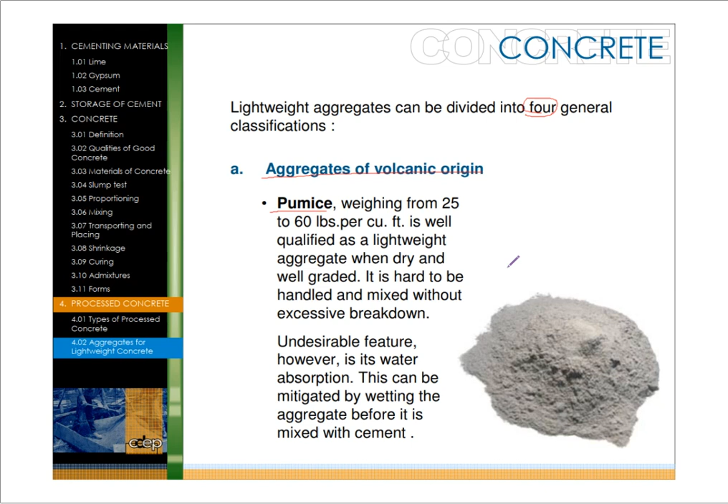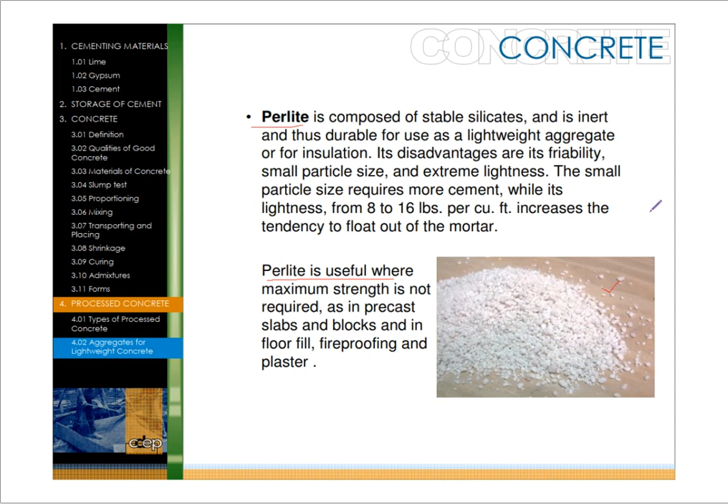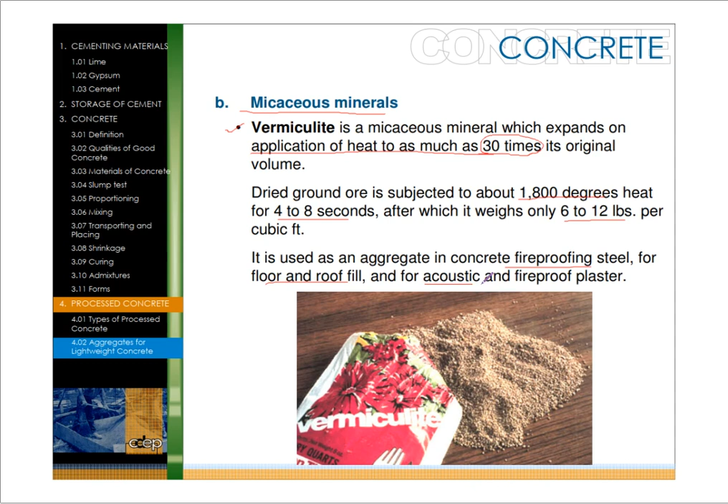Then lastly, the micaceous minerals, and the best known example is vermiculite. Vermiculite expands on application of heat as much as 30 times its original volume. Kumbaga, lalaki yung volume ng cement mixture na ginawa mo. Dry ground ore is subjected to about 1,800 degrees for 4 to 8 seconds, after which it weighs only 6 to 12 pounds per cubic foot. Pero gagaan siya. Used for concrete fireproofing of steel, floor and roof fill, and acoustic fireproof plaster.